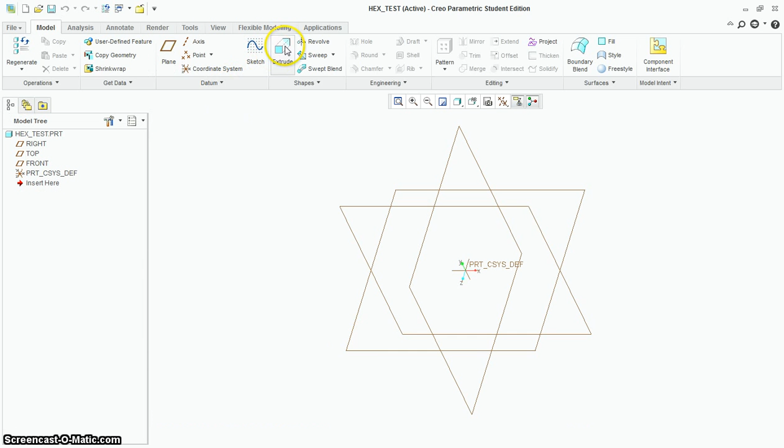And then click OK. Now it is an extrude, so we're going to click Extrude, Front, and Sketch View. You should be used to doing this now. This procedure is important, and I'm going to use a similar technique that I did last time.

So I am going to draw a line and dimension it, and I'm going to get it very close to what it actually is going to be. So I'm going to make this 98.83.

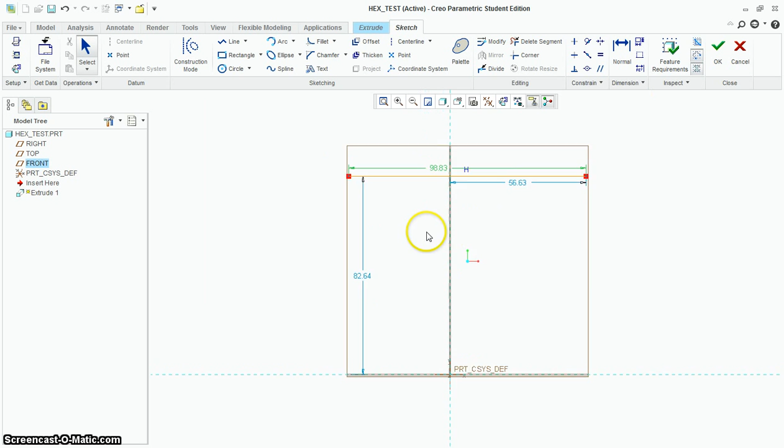Okay, and I don't need this exactly centered. I mean, we could mathematically center this if we want to, but I'm going to go ahead and rough out a little bit more of this shape.

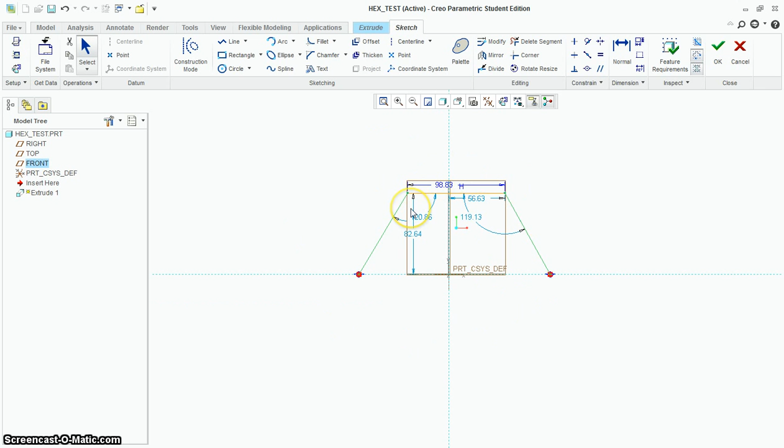I'm going to put in a line down to here, and I'm also going to put a line in down to here, and then I'm going to dimension a little bit more. By doing this and taking it step by step, it can be fairly difficult to dimension this drawing if you just draw the whole thing first, because then everything's way different than it should be.

So what is this upper interior angle? Look at your paper, and it's 125.

Now these dimensions did pop up. If it didn't pop up, you can add a dimension anywhere you want. This dimension right here, I don't know what that number's supposed to be, so you just ignore it. You don't have to know all the numbers and what they're supposed to be, it's okay.

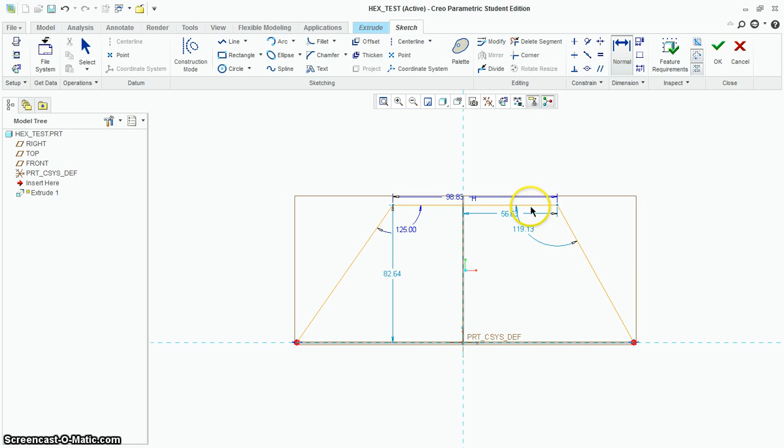So we're going to go to the dimension tool and say, from this line to this line, click, middle click, and it'll add that angular dimension in there, and that's also going to be 125. This drawing is symmetrical both vertically and horizontally.

Then what else do we know about it? Well, we know this is 150 in length, and we know this is 150 in length, so don't make that 150 the height, or from where this line starts on the y-axis and goes up on the y-axis. That's not the length of this line, so we need the length of this line, or if we made a triangle out of it, we would call it the hypotenuse.

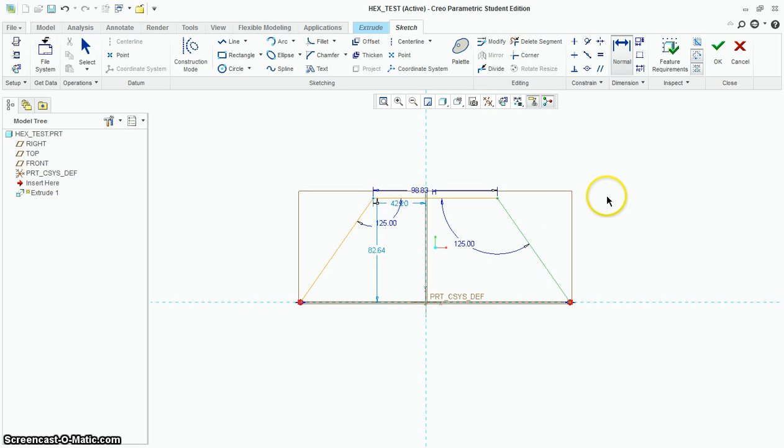So we're going to go to our dimension tool, click on that line, move your mouse out kind of perpendicular to this line, so it's like we're making a T on its side, and middle click out here. That will give you this aligned dimension, and this is 150.

Now this might be 150 now, but I'm just going to double check it. I'm going to go to my dimension tool, click, middle click, and yes, 150. Now it's not going to let you keep that dimension because it's saying, hey, you got a conflict here.

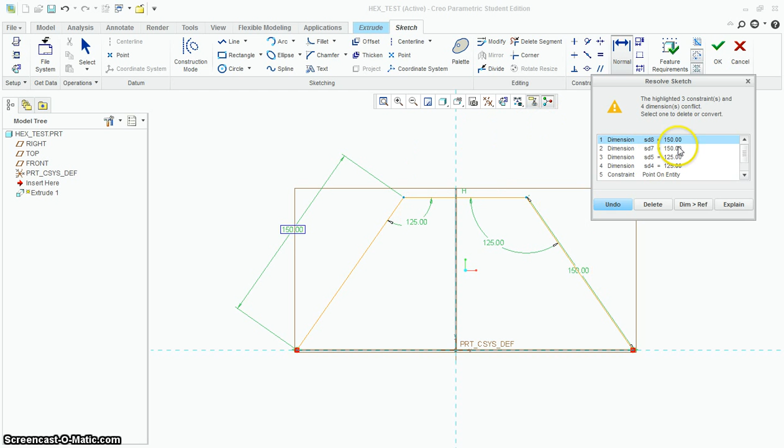If we let you change this number to a different number, then something else will have to change here. This will no longer be horizontal, or this won't be 150, or this can't be 125 degrees. So we just confirmed it's 150, that's good, so we're just going to delete that.

Now here's something cool about this. This drawing should actually be perfect, okay? And so if we want to mirror this, this is actually a cool tool.

You do need a center line to mirror, so I'm going to put in a center line horizontally across the middle of this hexagon. I'm going to highlight my entire drawing, the top half of the hexagon, and then go to my mirror tool up here at the top.

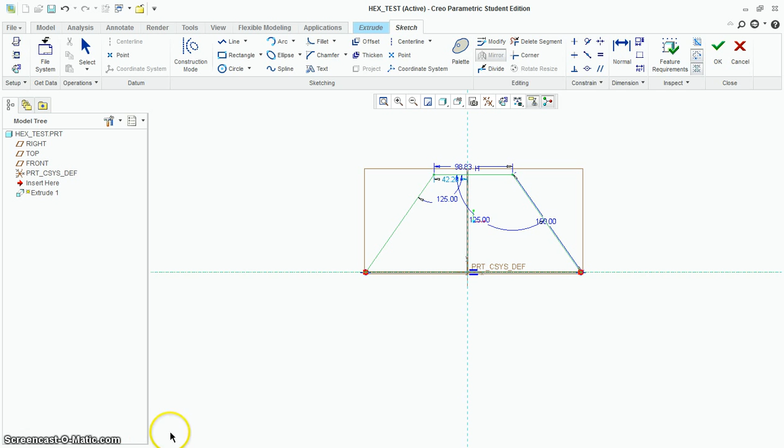Now if you read the bottom, it says select a mirror line, so that's going to be the center line for us, and you can see it mirrors it down. Now before we were like, okay, it's done, let's go ahead and check this angle right here and confirm that it's 110.

So get your dimension tool and click on this line, middle click, yep, 110. It's a good way to confirm, but it's not going to let you keep this number here because it will conflict with other things you've done.

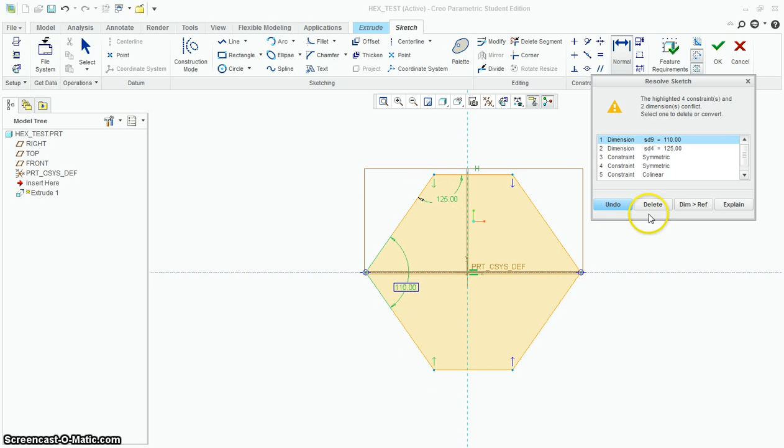Now this is only true if you mirrored it. If you drew the whole thing, it probably will let you keep the 110. So we accept it, there's our shape.

We pick our thickness that we want. I'm going to make this one thin, and you accept it and save it. And that is the hexagon.